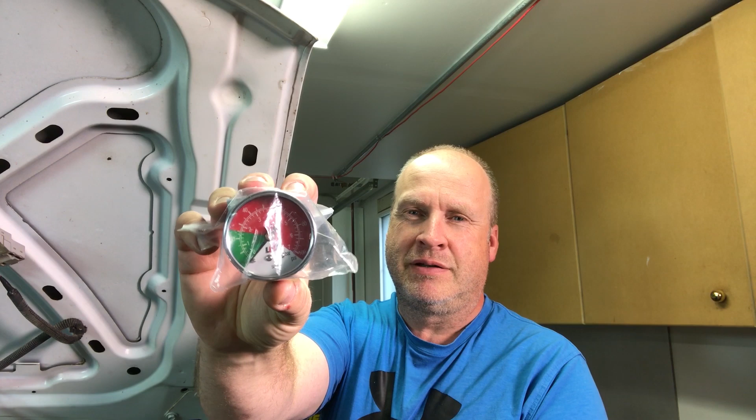So first thing we're going to do, the simple and easy way of checking your fuel pressure is we're going to put in a fuel pressure gauge, and that'll be good for just a quick visual indication of our fuel pressure. But I really want something that I can log in HP Tuners, so we're going to figure out how to wire in this. It's basically a pressure sensor that I got off Amazon. I think I got it a year or so ago when I first started the channel, and I was messing around with an Arduino boost controller, and I was using this as a boost pressure sensor, but I think we can make it work as a fuel pressure sensor input to the ECM as well.

But because I've already used my EGR wire to wire in the 0 to 5 volt from my wideband, and this sends out a 0 to 5 volt signal as well, we're going to have to find a different spot to wire that into. So I'm thinking it'll either be the fuel pressure sensor, or I've heard of guys using the AC pressure sensor, but I don't think my truck actually has that. So we're going to figure that out as we go, and hopefully we can make it work and be able to log our fuel pressure in HP Tuners the way the Gen 4 and Gen 5 guys do. So we will flip the camera around and get started here.

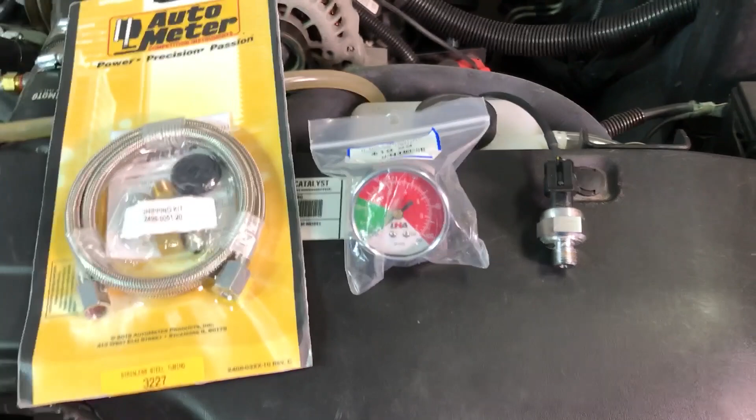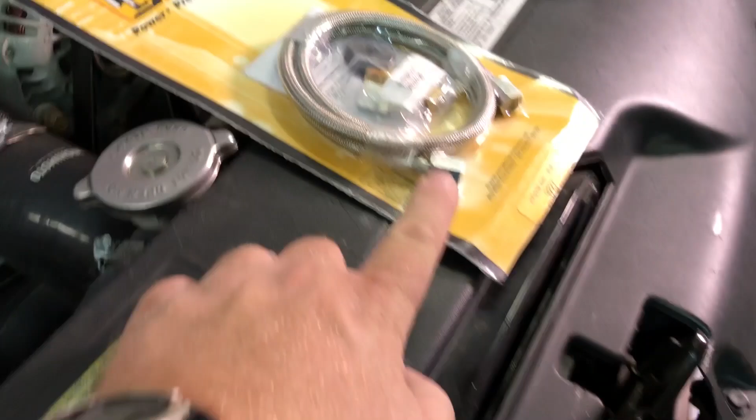Okay, so to plumb this, first we'll hook up the gauge, and I'm not sure if we'll have both the gauge and the sensor hooked up at the same time. I guess it'd be nice to do it that way so I can verify that my sensor reads the same as the gauge. But basically I got this Auto Meter braided hose, part number 3227, and there's a little Schrader valve inside this cap on the fuel rail here, so we'll thread that Schrader valve out of there and thread this hose onto there, and then there's some adapters and stuff here. And the gauge I just got at Princess Auto.

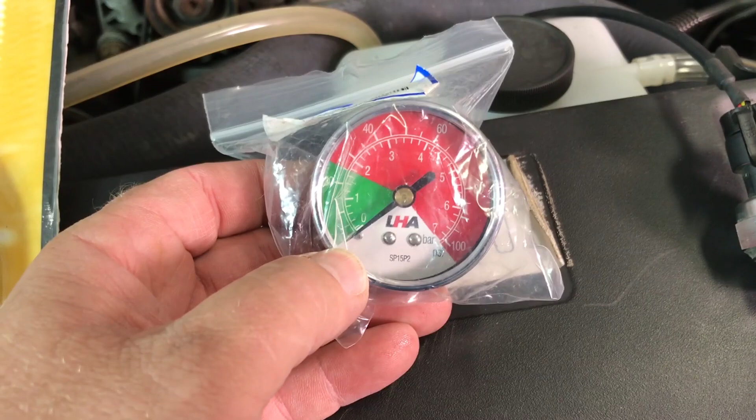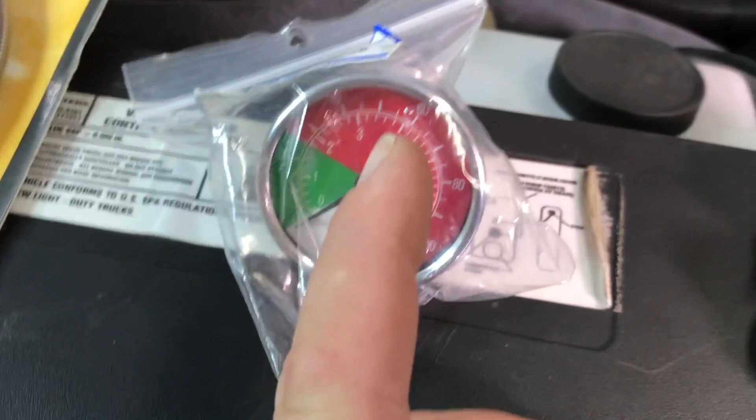I think it's actually meant for some kind of hydraulics, because it's got this red and green indication on here, but it's 0 to 100 psi anyways, which will be about the range we want, since it should operate at about 58 psi under normal conditions. And I think this is actually boost referenced. If you look at the fuel regulator, there's this hose that goes up to the intake manifold. So I think for every pound of boost pressure, I should have one more pound of fuel pressure. So we'll see if that's actually how that works.

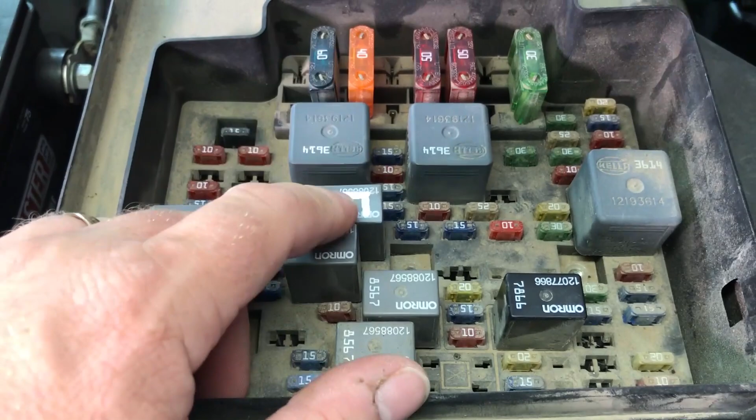But first, because there should be 58 pounds of pressure in that fuel rail, to relieve that pressure we'll open the fuse box under the hood here, and you can see, if I get the lighting right, I've marked one of these relays with an F, and that is the relay we've got to pull to disable the fuel pump. If you look at the chart here, it says that relay is F pump, but since I work on my fuel system quite a bit, I just put a big F on that relay there.

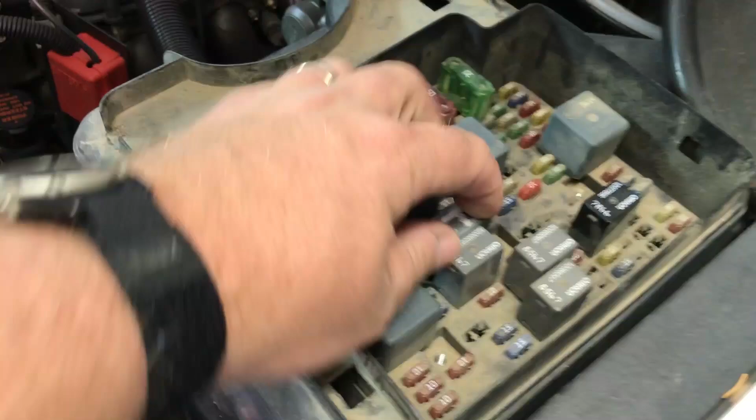So I will open up the garage door so we don't get gassed out here, and then we'll fire up the truck, and I'll pull that relay out. I'll just make sure it's kind of loose here, it sometimes takes a bit to get it out. I'll just put it in lightly there, and then we'll open the door, fire up the truck, and pull that relay, and that'll shut off the fuel pump, and it'll use up most of the pressure that's in the fuel rail system, and won't spray as much gas all over when we pull that little Schrader valve out. So we'll do that now. Okay, so I'm going to start up the truck like I said.

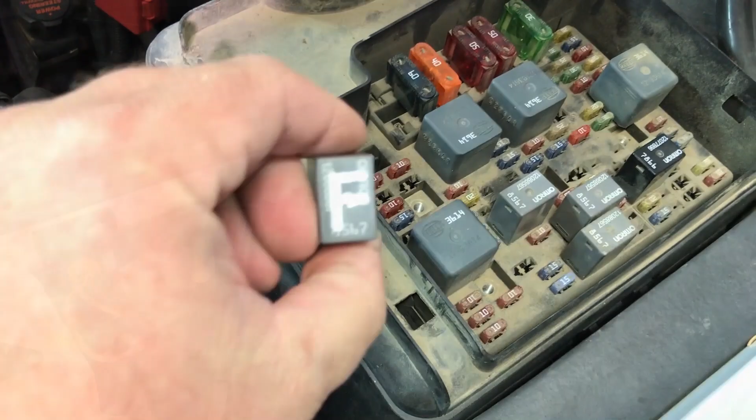And then we'll go pull the relay. Okay, so I got this Vortec cover loose here so we can access this port on the fuel rail. So I'm going to pull this little cap off, and then you should be able to see there's like a bicycle Schrader valve in there.

So I'm going to take a little screwdriver and just relieve any pressure that, oh yeah, there's still a bunch in there. I thought running that fuel pump would relieve a bunch of that, so I'll just give her a couple more shots here. Probably should have used some kind of bucket or container or something, but anyways, now I know that the fuel pressure is relieved and down to 0 there.

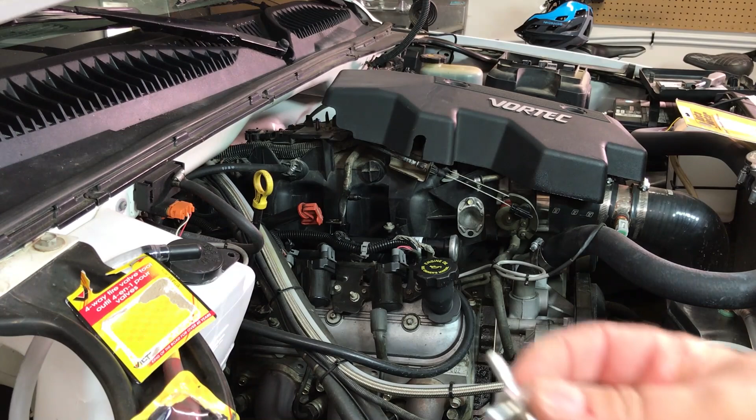I'm going to grab just a regular tire valve tool, and I think we should be able to thread that Schrader valve out of that port in the fuel rail there, so we'll do that. Okay, so I got just a regular tire Schrader valve tool. That's the package it came in, 4-way tire valve tool. So now I'm gonna reach in there, and now that we've relieved the pressure, we shouldn't get a big blast of fuel coming out, I don't think.

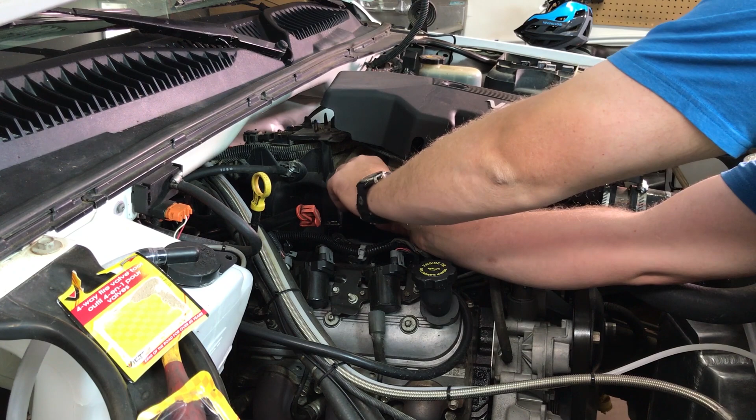There's a bit dripping down there, but oh, I guess it takes a bit more threading. Just thread it in there pretty good, so I'll put that tool back on. Thread her out a few more turns yet. And now I've got, I don't know if you can see that there, it's just like a regular tire valve like you'd use to put air in your tire. So now that we've got that off of there,

I'll open up this package here, and then I think this hose end here will thread directly onto that fitting on my fuel rail crossover pipe there. So okay, we got that hose out of the package, so we're just gonna thread it onto that fitting there, and it does thread on nicely, and it just takes a regular 9/16 wrench, and we'll tighten that up, but not go so tight that it strips. But seeing it is dealing with gasoline, and we're right above the hot exhaust manifold, and the turbo is right down here, we do want it good and tight.

And now we'll dig out that adapter kit that came with the set, and we'll basically adapt it to this gauge, and then we can actually take it for a drive and monitor our pressure just with the fuel gauge. Okay, to install this gauge, I've got this adapter that came with the kit. I think this is like an AN4 is what that hose is, and then it's just got a female 1/8 NPT, which is the same as what this gauge is. So I'll thread that onto there, and it just tightens up again with a regular 9/16 wrench.

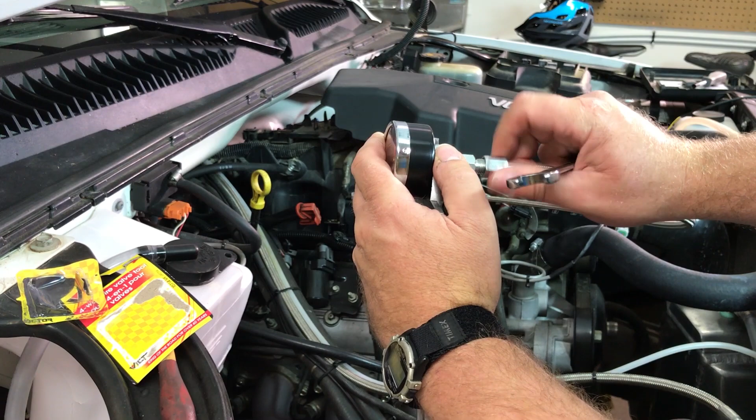And again, we don't want to strip the threads or anything, but we don't want it to be leaking gasoline anywhere. And then this other end of the hose will just thread on there like that, and we'll tighten that up. Now if we wanted to, because you're not supposed to mount a fuel gauge in the cab, we could mount a little bracket or something so you can see it through the windshield or whatever, eh? I've seen guys do that before, but

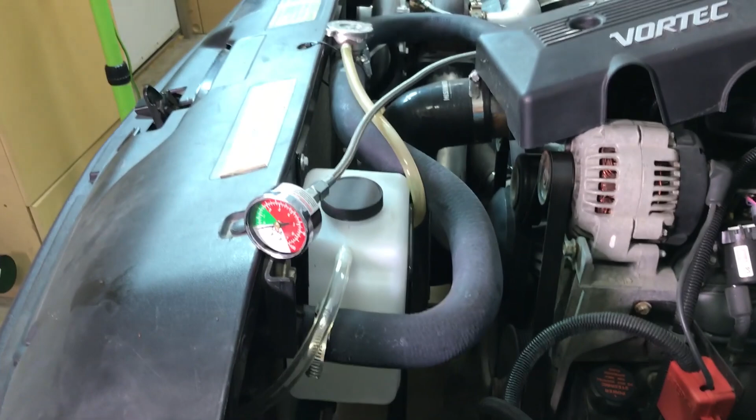I think for now I'll just set it up there somewhere where I can see it, and then we can take it for a drive and see what our fuel pressure is doing, and then we'll come back and work on getting this electronic sensor hooked up so we can log that in HP Tuners. Actually, I think rather than going for a drive, I'll just put this gauge where I can see it here, and if we plug our fuel relay back in, and if I go and turn the key on, we should see just under 60 pounds of pressure on that gauge, I think. So we'll turn the key on.

Sorry, camera cut out on me for a second there, but yeah, that's weird. I thought that with the truck not running I would still have my 58 pounds, but you can see I don't even have 10 pounds there. So maybe we'll try. I'll open up that garage door again and we'll actually fire up the truck and see what our fuel pressure does.

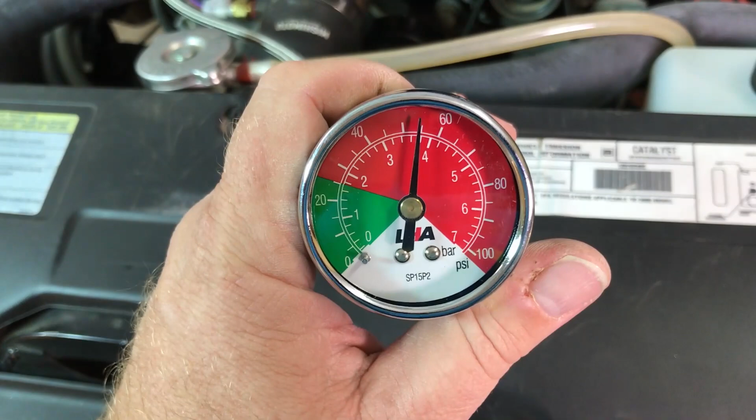And there you go. I figured out every time I start my truck, my phone connects to the Bluetooth in the stereo and stops the video that I'm recording. But you could see there when the truck was running that I had about, I think it was 55 pounds or so of fuel pressure. So the gauge is working. Now we'll look into getting that electronic pressure sensor working.

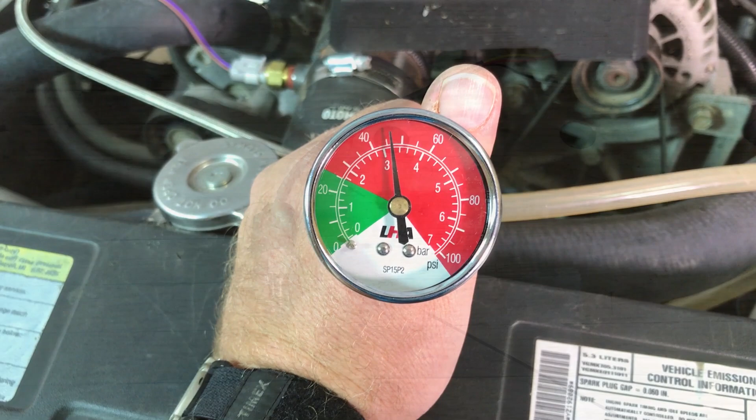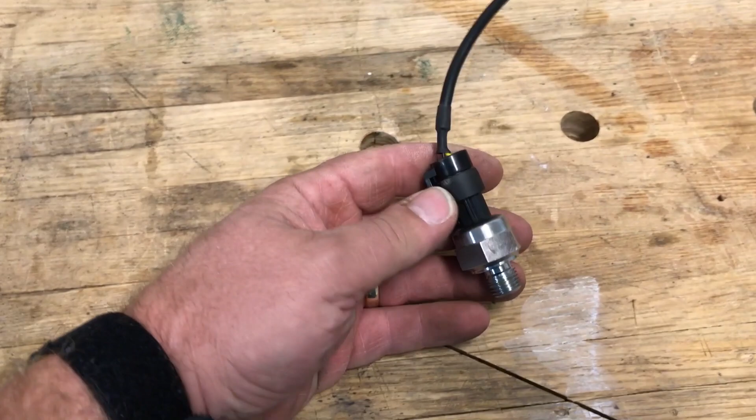Alright, so we got that pressure gauge working the way it should, and if we wanted just the pressure gauge we could mount that permanently. But like I said before, I kind of want something that I can log with HP Tuners, so we're going to try and figure out how we can get this pressure sensor wired into the truck and be able to log it in HP Tuners. The problem I've got is I bought this like a year ago for a different project, and I'm not sure what the range of it is.

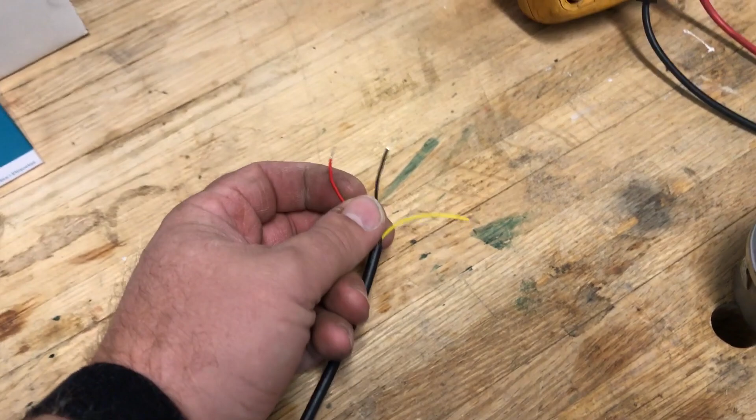I know it's 0 to 5 volts, so I'm going to do some testing on the bench. I've got a power supply here that I borrowed from the plant that I work at, and it is putting out 5.00 volts. So basically we've got to connect power to this red and black wire on this sensor. We'll put 5 volts to that, and then this yellow wire is the output of the sensor. The voltage coming out on this yellow wire will be proportional to the pressure that is on this.

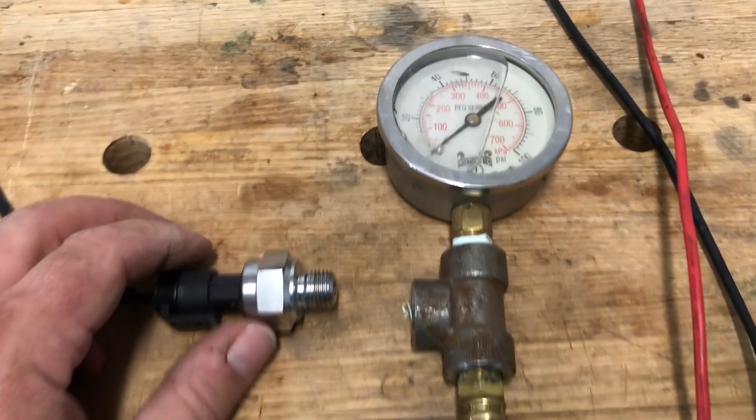To test this, I've got a little fitting rigged up tied into my air compressor down here. First of all, I'm going to hook it up with no pressure on it and see what we read for a voltage out on this yellow wire. And then, because we shouldn't have to go any higher than like 80 pounds, I'll put like 20 pounds on it and measure what we got for voltage, and then do 40 and 60 and 80, and make a chart of what my voltage is at each one of those pressures. Then we'll have to do a bit of math and figure out a formula to enter, a custom user defined math formula in HP Tuners.

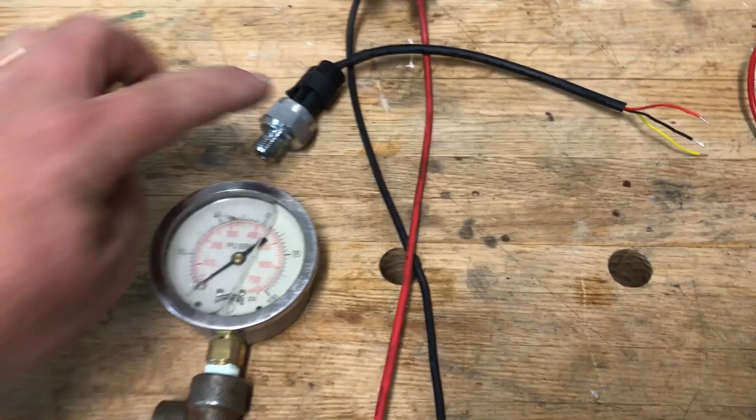But what we'll do right now is get this hooked up with the red and black to our 5 volt power and get rigged up to measure. Basically we'll be measuring the voltage between this yellow wire and the black wire and making a graph that will tell us the calibration, or the range of this pressure sensor. So we'll do that now.

Okay, so like I said, I've got 5 volts hooked up to the red wire, black wire is going to the negative on my power supply.

And then, oh, heater just kicked in. It's getting cold up here in Canada, and there's snow on the ground this morning.

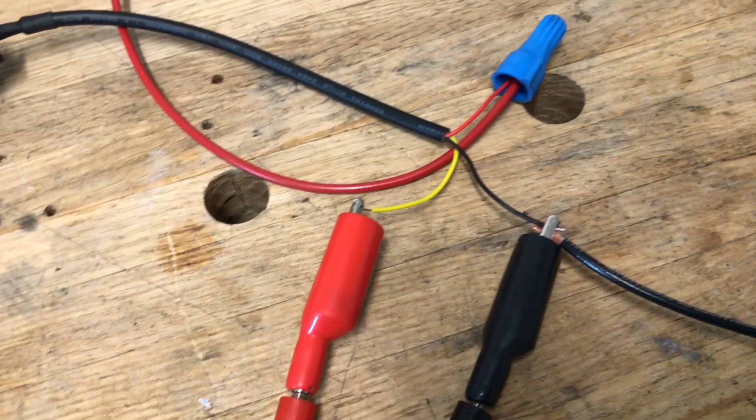But anyways, we're measuring the output of this pressure sensor on the yellow wire, with reference to ground on the black wire. So you can see with no pressure on it, just sitting on the bench, we've got 0.491 volts. So I'm just making a chart here. I wrote down at 0 psi, I've got

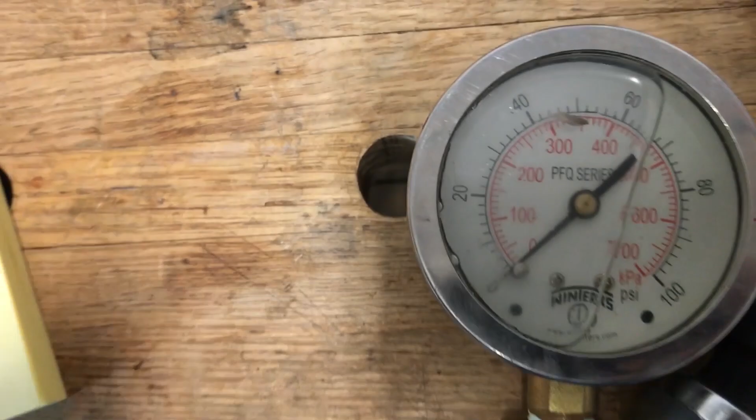0.491 volts on it. So now we'll thread this sensor into this T-fitting here and crank up the regulator on the compressor until we've got 20 pounds of pressure on it, and record our voltage. Then we'll do it at 40 and 60 and 80 pounds as well. We shouldn't need to go higher than that, but maybe we'll do it at 100 as well, just in case I'm running 40 pounds of boost at some point. So we'll do 0, 20, 40, 60, 80, and 100 psi.

Okay, you can see we're at 20 pounds on the gauge there, and we're at 0.944 volts at 20 pounds. So I'll write that down on my little sheet, and then we'll go up to 40 pounds. And now you can see we're at 40 pounds on the gauge, and we're at 1.412 volts on the voltmeter on the output on our yellow wire. So we'll record that and go up to 60 pounds.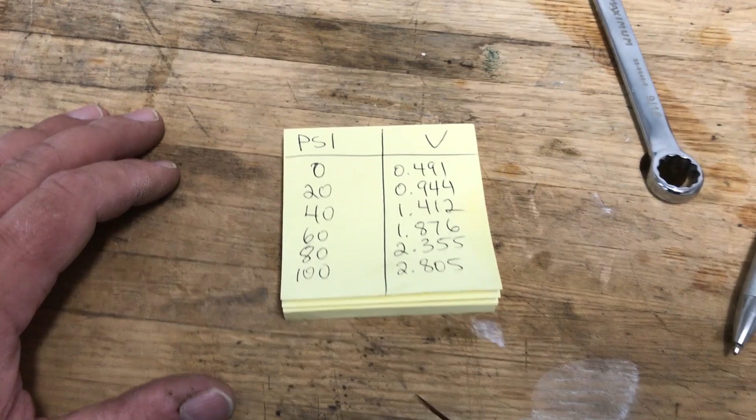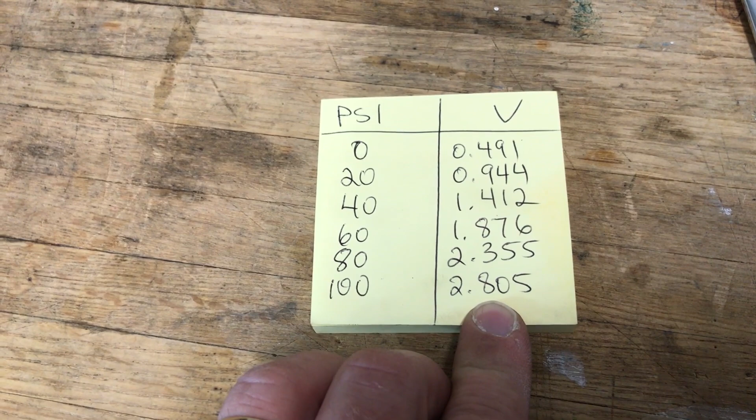Alright, so there's our, I don't know if you want to call it a calibration chart or range, but basically it's telling us what the voltage is for each pressure in 20 pound increments from 0 to 100. So now we've got to figure out a formula, and I shouldn't have dropped out of high school because I remember something like y equals mx plus b or some deal. But basically we got to figure out a formula to multiply this number by some constant, and add some number to it to get this number, and see if we can figure out one formula that will work for all of these numbers.

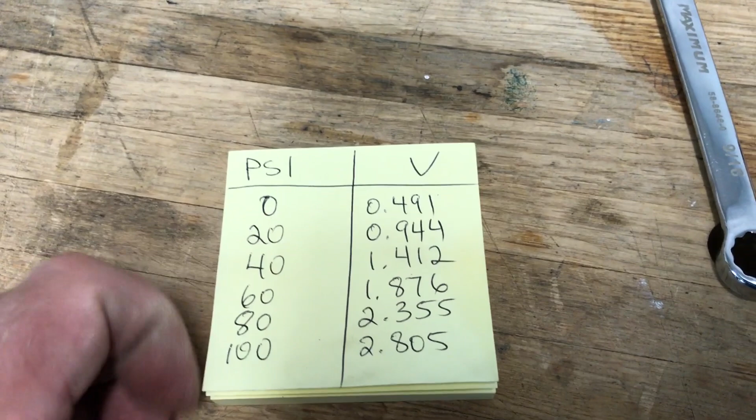So I'm going to shut off the camera for a minute and think about this, but I'm thinking the number we're going to have to add in the equation will be this 0.491, because, or subtract, I don't know. Let me get my head wrapped around this, and once I've got it sorted out, I'll turn the camera back on. Alright, I think I got this figured out here.

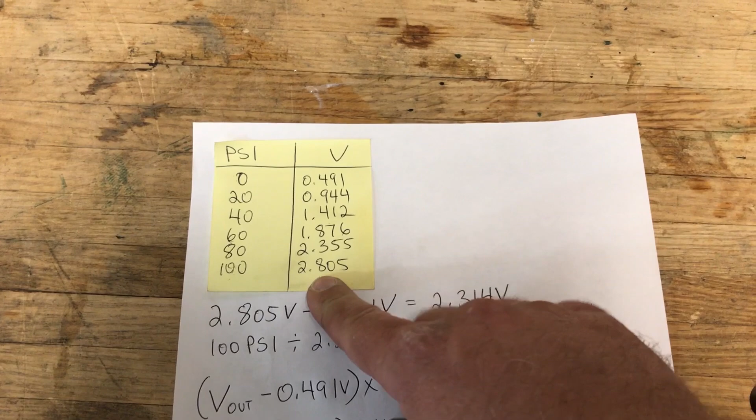So I took this chart from the test we just did here, and we know the change in PSI is 100, so I had to figure out the change in voltage for that 100 PSI. So I took this voltage at 100 PSI, the 2.805, and I subtracted our voltage at 0 from it. So I got 2.805 minus 0.491, and that gives me a change in voltage. So the voltage changed 2.314 volts when the pressure changed 100 psi. So that helped me come up with this number.

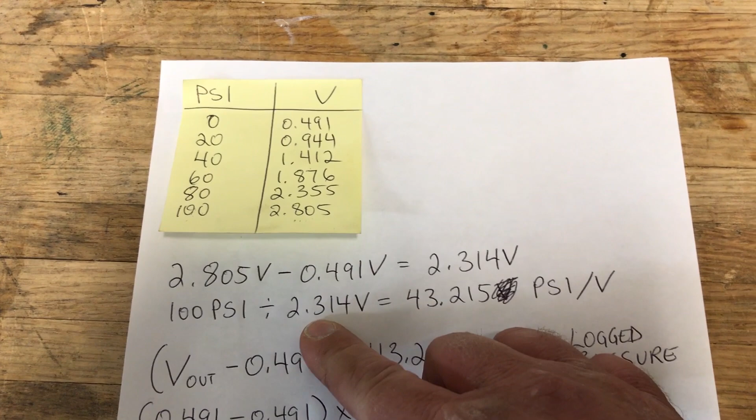So I took the change in pressure, which is 100 psi, divided by the change in voltage, 2.314 volts, and I came up with this factor of 43.215 psi per volt. So anytime the pressure changes 43 pounds, the voltage will change a volt.

So I use that constant to come up with this formula here, which is what we'll end up entering into HP Tuners. So basically you take the voltage that this sensor is putting out on the yellow wire, subtract 0.491 from it, and multiply it by this 43.215, and that will give you the pressure being logged by HP Tuners. So I just went through and tested all of the voltages on this chart. So at 0 psi, obviously 0.491 minus 0.491 is 0, times 43 comes up with 0.

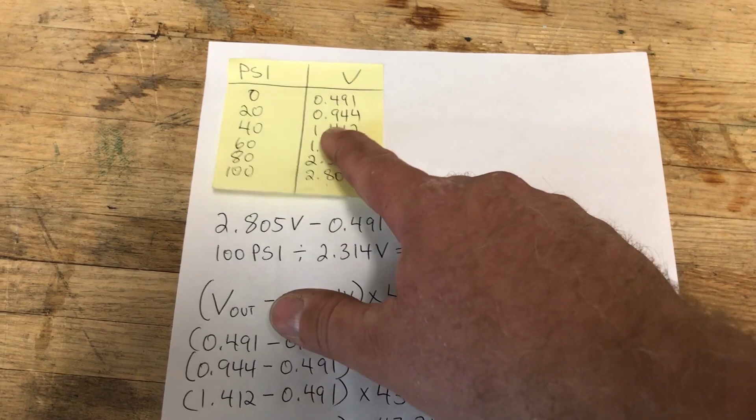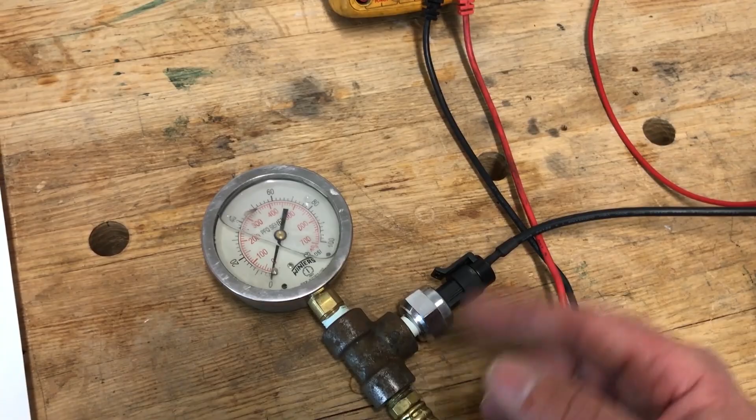This 0.944, subtract our 0.491, multiply by our 43.215, and we come up with 19.57. So the reason it's a little bit out is because this sensor isn't linear, it's not going to be dead on. But the main thing is, I checked it at 40, we'll be logging 39.8, but the pressure we're actually running at, which will be 58, we're only 0.15 of a psi out at 60. So it's pretty well bang on.

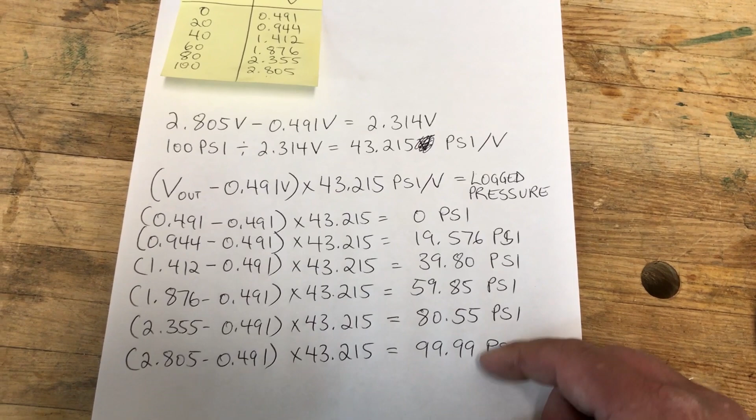It's 0.2 psi out at 40, 0.15 psi out at 60. At 80 it's a little high, and at 100 it's bang on. But at the pressures we'll be operating at, it'll be pretty darn close. So that's the formula we're gonna end up entering into HP Tuners.

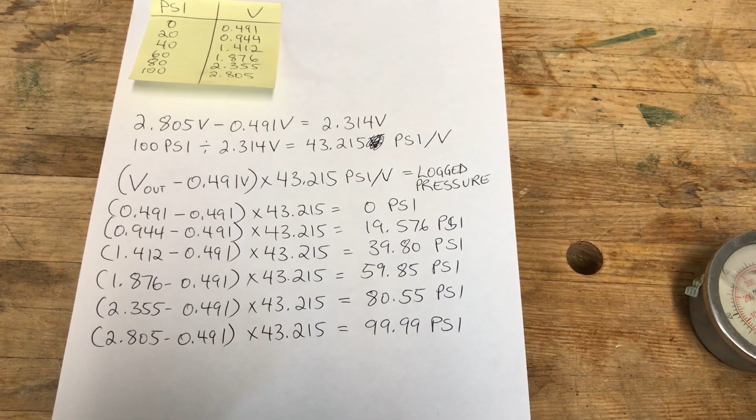But first, I got to figure out how we're going to get this sensor wired into the truck. So I did a little bit of research, and I found out that these trucks, like I mentioned before, don't have that AC pressure sensor. So I think I'm going to have to go with the fuel tank pressure sensor. So I think we're going to put the truck up on jack stands here and see if we can find that wiring for our fuel tank pressure sensor.

Okay guys, so I got the truck up on jack stands here, and I actually hooked up my laptop and started up the scanner here, and I added a channel. I'll show you guys how to do that in a little bit here, but added a channel for fuel tank pressure, and right now it's reading 1.56 volts.

So I'm going to crawl under the truck and disconnect the connector on top of the tank and make sure that drops to 0, and that will tell me that I'm dealing with the right wires that I want to wire up my Amazon sensor to there. So we'll crawl under the truck now and disconnect that sensor and make sure we got the right wires that we're working with there.

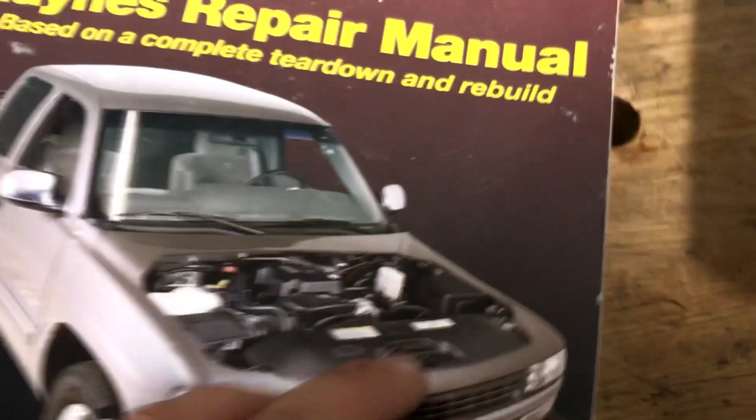And just before we go under the truck, I'm going to look at the wiring diagram here, and this is in a standard Haynes repair manual for this truck. And so it shows fuel tank pressure sensor. The colors we're looking for are black, dark green, and gray.

And from what I've seen, like from wiring in the EGR sensor and stuff, the black and the gray are pretty standard colors. Like if you follow the gray, it goes over here and over here. And so the gray is your 5 volt power to the sensor, just like over here on the bench. We've got our 5 volts power. That's always on that red wire. So that's the wire we're going to connect the red wire of the sensor. We're going to connect to the gray wire in the wiring harness.

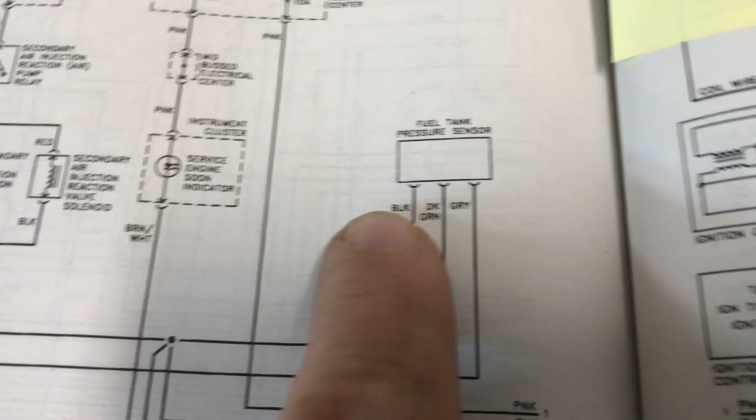And then the black is your negative, so that's going to be the same as the black of the negative on that sensor. And then the dark green is going to be our signal wire, which is going to connect to the yellow wire on the sensor. So we'll crawl under the truck now and try and find the connector for that sensor, and I'll unplug it, and then we'll verify on the scanner that our voltage has dropped to 0. So we'll see you underneath the truck.

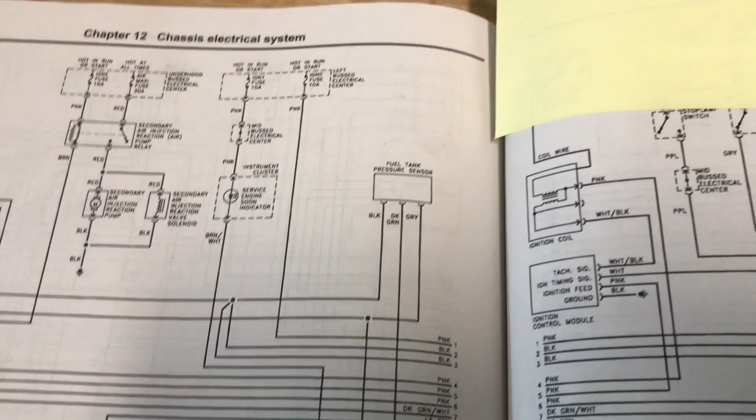Okay, I'm underneath the truck. I'm looking at, this is the top of the fuel tank, that little hanger where your fuel pump and stuff connects to. So you can see the two wire bundles there. The one on the right, I believe, is the fuel pump, and the one on the left, that one right there, I believe, is the connector for that fuel pressure sensor.

So I'm gonna have to turn the camera off here and reach up in there and unplug that connector, and then we'll get those wires out of there, and I'll verify that our voltage has dropped to 0 on the scanner. So alright, you can see that's the top of the gas tank there. I got this connector disconnected, and those are the wires that correspond with the colors in that wiring diagram I just showed you guys. We got a gray, a black, and a dark green.

So those are the wires we need to connect our sensor to, but the problem is we got to get them up to the front of the truck, to the engine compartment. You can see I've got them pulled out of the harness a little bit there. I'll try and pull them out a bit more, but I think we're gonna have to run some other wires to extend them back up to the front of the truck.

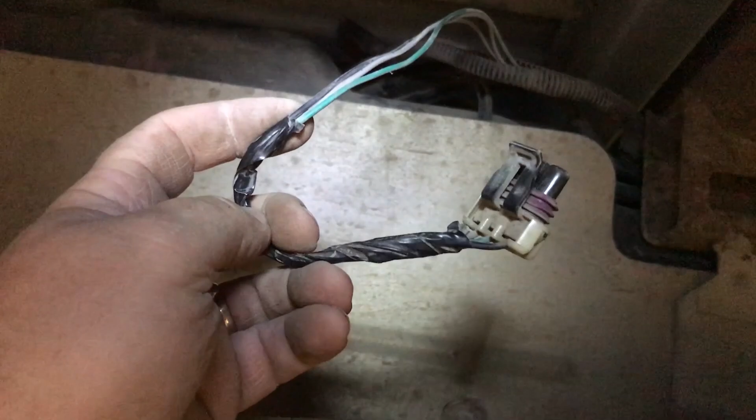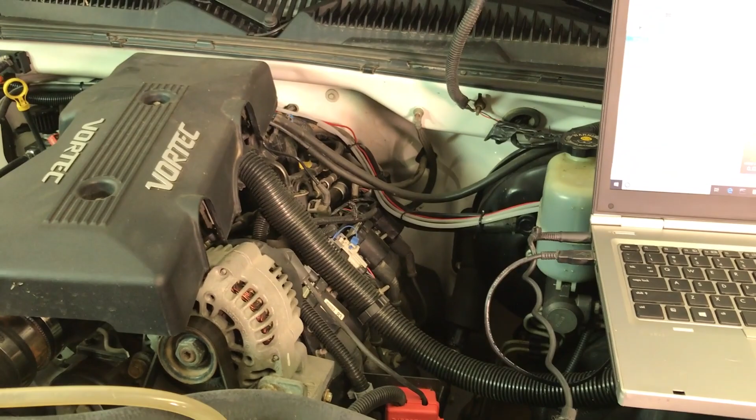Okay, and now that I've unplugged that connector, you can see our fuel tank pressure sensor voltage has dropped to 0.02. So that tells us we're dealing with the right wires. So now I got to figure out how to route them wires from back by the fuel tank to up here somewhere where I can connect to my fuel pressure sensor. So we'll figure that out now.

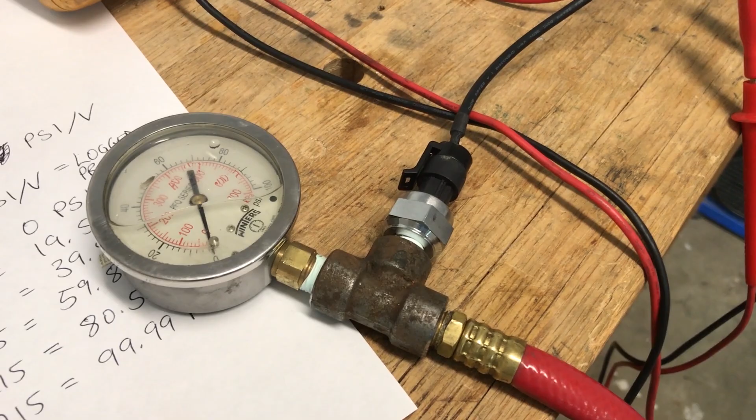Okay, so that wiring harness for that fuel pressure sensor is too intertwined with the main harness. I can't get the wires up to the engine compartment there, so I'm just going to extend them. This is basically trailer wiring. It's four 14 gauge wires all bundled together, so I'm going to use that to extend that wiring up to the engine bay so I can connect this little fuel pressure sensor here. So we'll do that now. I'll get this wire ran from the fuel tank area up to, and I'll show you guys here.

So I got that braided hose connected to the fuel rail right there, and I just kind of ran it down underneath the throttle body, and it's coming up, and I'll mount that fuel pressure sender probably to the firewall right around there, I think. So that's the area I want them wires to come up, so we'll do that now.

And that's what that bundle of four 14 gauge wires looks like when it's off the roll. I just cut a chunk long enough to go from the fuel tank to the engine compartment, and then because I only need 3 wires, I think I'm going to peel that green wire off of there and just use the white, brown, and the yellow. So we'll get that wire ran now.

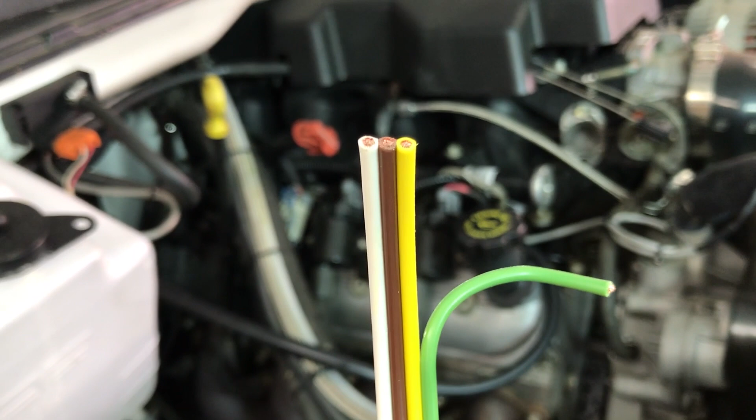Okay, I just wanted to show you guys how I routed this wire here. So I'm going to splice that bundle of 3 wires onto the 3 wires that I disconnected from the top of the fuel tank there, from the pressure sensor. And then I just ran them. Let me grab my light here. So there's some kind of fuel hose there that I zip tied it to, to keep it away from the drive shaft.

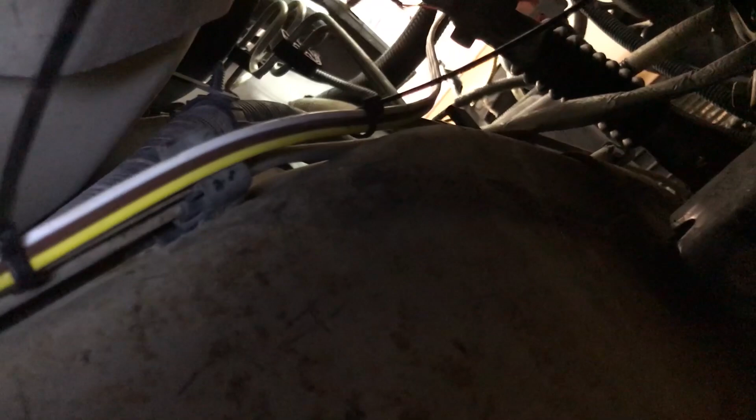And then I zip tied it to some, hard to see, but zip tied it to some brake lines, went around this ABS module or whatever, and then zip tied it to some more brake lines, and now we're up by the front of the truck. Zip tied it to more brake lines. I forgot to cut the tags off my zip ties there, and then it goes up into the engine compartment there. You can see the steering column and all that. So that's how I got it from the fuel tank up to the engine area. So we'll go back to the fuel tank there and splice up those wires now.

Okay, just wanted to show you guys how I splice these wires together down at the fuel tank. So these are those 3 wires in the wiring harness that used to connect to that fuel pressure sensor, and I just connected the gray to the white, the brown to the black, and the green to the yellow. So again, the gray will be our +5 volt supply. The black will be our ground or our common or reference, and the green is going to be our signal.

So on the other end, when we connect to the sensor, white will go to the red, brown will go to the black, and yellow will go to the yellow. So now I'm just gonna zip tie this up out of the way so it stays away from the drive shaft here, and then we'll go up under the hood there and get that sensor wired up.

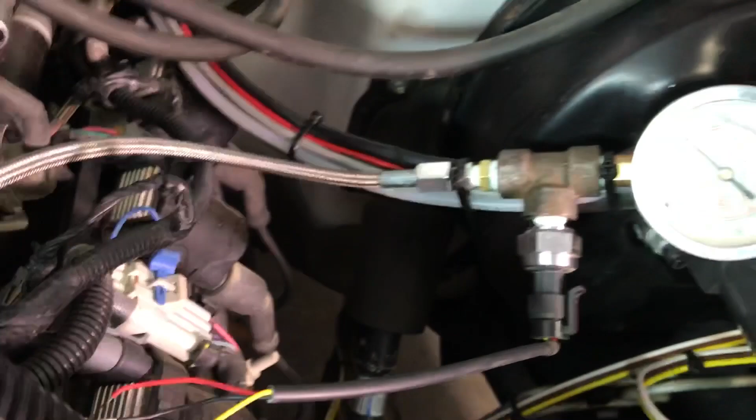Okay, I'll show you guys the engine bay side of it now. So now I'm looking down from the top, and you can see where I've got that wiring harness zip tied to those brake lines, and then it comes up, and then I just left an extra loop of a couple extra feet of wire, because in the future I'll probably mount that sensor to the firewall, but for now I've just got it zip tied to this bundle of wire, and I've got a gauge in there too, so I can compare what my sensor is reading in HP Tuners with what the gauge is saying.

And like I said, I've just got that braided fuel line ran underneath the throttle body and connecting to that fitting on the fuel rail like I showed you earlier in the video. So it just goes down underneath there and over to that T fitting where I've got the sensor and the gauge. So now I'm gonna cut these wires right about here and connect them to these wires going to the sensor.

And then like I said, if you wanted to, you could put another hose off of there and run a fuel pressure gauge to somewhere where you could see it from the cab, but if my sensor's reading 0, like the gauge is reading 0 right now, and when I pressurize the fuel system and start the truck, if it's reading 55 or the same as the gauge, we'll call it good, and I'll trust that sensor. So I'm not even going to install that gauge where I can see it.

And like I said, in the future I'll probably get rid of that T fitting and just mount the pressure sensor to the firewall right in there somewhere. But this will just be kind of a temporary setup to see if it works.

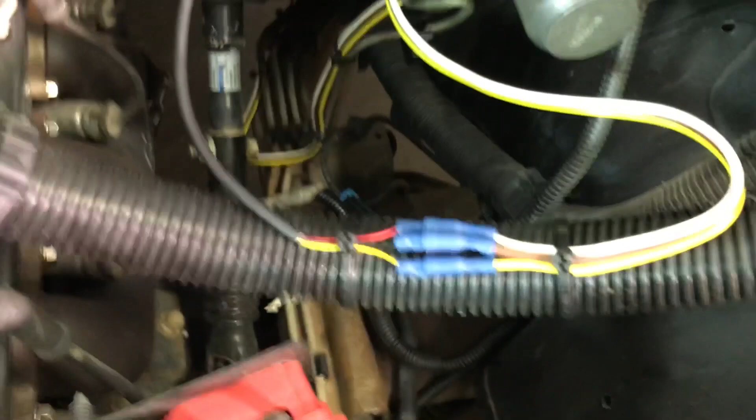All right, and there you can see I've got the wires connected there, and like I said before, yellow is going to yellow, brown is going to black, and white is going to red. So now I'll hook the laptop up again and turn on the key. When I had that sensor on the bench with no pressure on it, I think it was reading 0.491 volts.

I'll hook up the laptop and we should be reading that same amount because we've got 0 fuel pressure on the gauge. Actually, before I check that, I'm going to pull that fuel pump relay out again. Otherwise, as soon as I turn on the key, that's going to start pressurizing that system. So we'll do that test with this fuel pump relay out.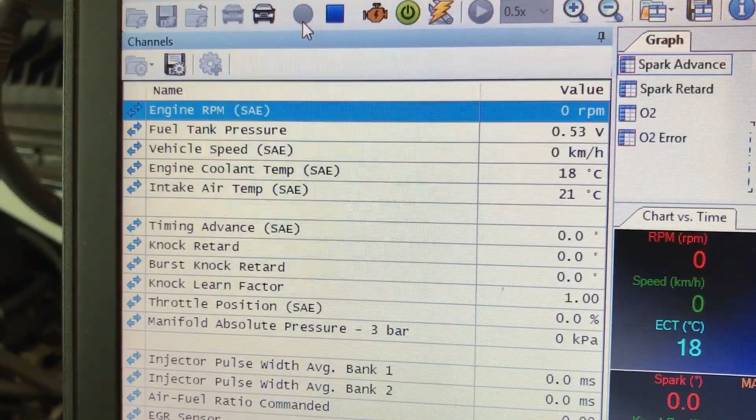Alright, so I got the laptop fired up and logging with 0 pressure on the gauge, and I'm seeing it's bouncing between 0.51 and 0.53 volts. That's pretty close to what I had with my other power supply on the bench, about 0.49 of a volt, so it's 2 or 3 hundredths of a volt different. So that's actually the value I'm going to be using in the formula. Instead of subtracting 0.491, I'll subtract 0.51.

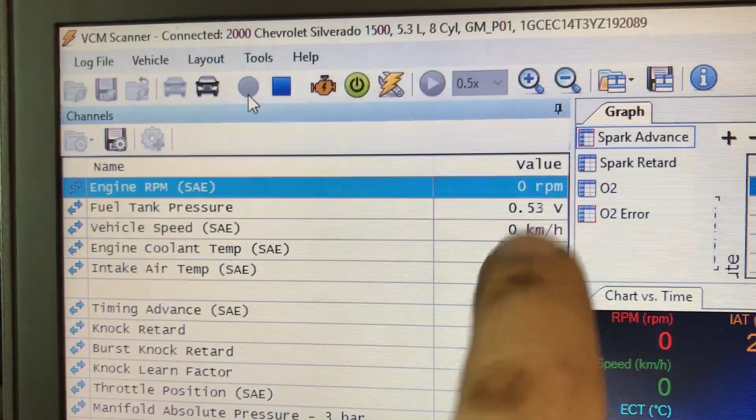So switch to the laptop's view now, and we'll figure out how to enter that user math and get it set up so that we can log our fuel pressure in our VCM Scanner. Okay guys, so got the laptop view fired up here. First I'll show you how to add that channel. I had it added before, but I deleted it again so I can show you guys how to do this.

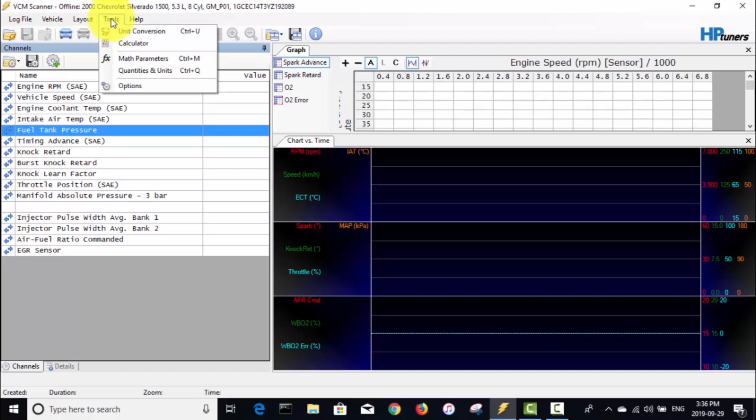So you click on that gear with the plus sign to add a channel, go into fuel system, tank, and fuel tank pressure right there. You can double click on that and you can see it added it in right there. So now we've got to add a user math formula for converting that voltage to a PSI that makes sense to us. So you click on this tools tab up here, go into math parameters.

It's under this user maths tab here, and I've already got 4 custom user math things plugged in. So I'm gonna pick my first available one, which is user math number 5. Click on that, and we're gonna call this fuel pressure. We're gonna add a new variable. Click on this link here. We're gonna add that same fuel tank pressure voltage. Double click on that, and it's in volts. We don't need any special functions, so we'll just click OK.

So there is the parameter for fuel pressure. I'm gonna go add in another bracket here. Whoops, not that kind of bracket, that kind of bracket. So we're going to take that and then subtract that 0.51 volts that we were seeing in the scanner here when we had 0 pressure on there.

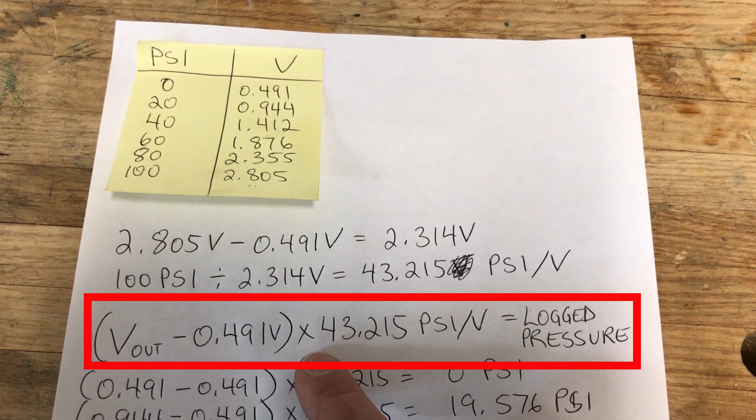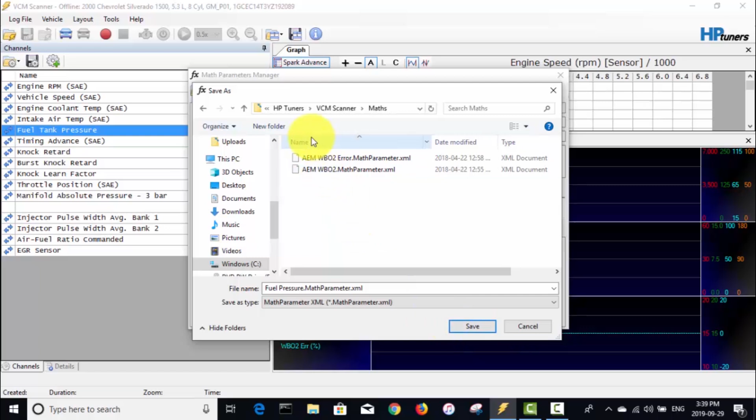So now that we've got that user math parameter in there, not sure if we need to save it. Let me just have a look here. Maths. Yeah, so I've got my wideband O2 math parameter saved in there. So I'm going to save this fuel pressure math parameter in the same folder under HP Tuners, VCM Scanner, Maths. So that is saved.

So now we should be able to close that out and add it to one of our graphs here. I'll right click on this area here, go to charts layout, and these other groups already have 4 parameters in, so I'm going to add it to this group 3. So we go add series, and we'll call it fuel pressure.

Oh, I guess you can't have that many letters. We'll abbreviate it, and then click on this link, and we'll have to scroll down to our user defined maths, and click on our formula that we just added in. Our units will be PSI. Doesn't let me select those here for some reason.

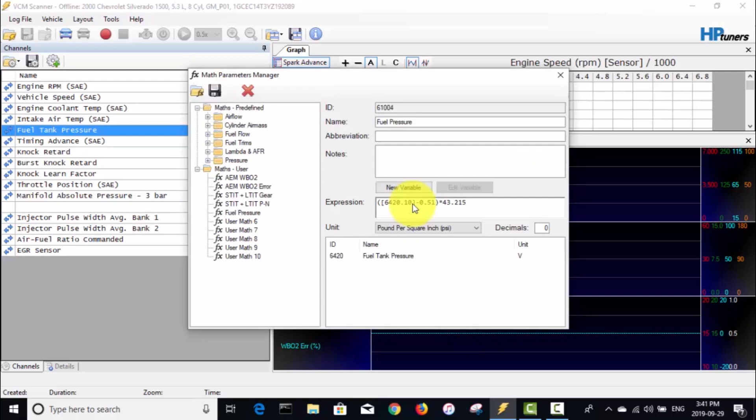Let me go back. Just going to close out of this for a second, go back to that math parameter and see if there's a place I can set the units. Yep, right there. PSI. So now I'll save that again. Yes, I want to replace it. Should be able to close out of this now and go back to our charts layout, fuel pressure, and let me delete this and start over.

So I'm going to add a series, fuel pressure, abbreviated, add our user defined math parameter, and there it lets me pick pounds per square inch right there. Decimal points, let's go to 2 decimals. I'm not planning on running much more than 15 pounds of boost, so 15 pounds over 58 or 60 would be 75, so if we go to 80, that should be fine.

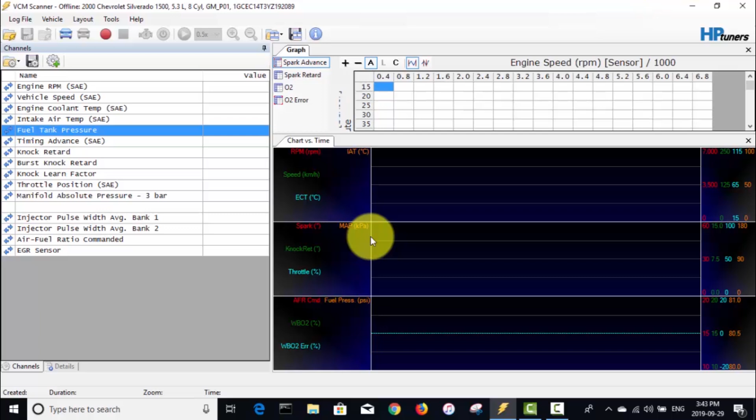Color, whoops, reference line, we don't need color, pick one. And now I'll save this, we'll save all groups, and I'm calling this my VE tuning chart, so we'll save that. Yes, I want to replace it. Okay, now I will pause this for a second because I'm sitting over on the workbench, not connected to the truck. We'll take the laptop over to the truck and see if we can log our fuel pressure here.

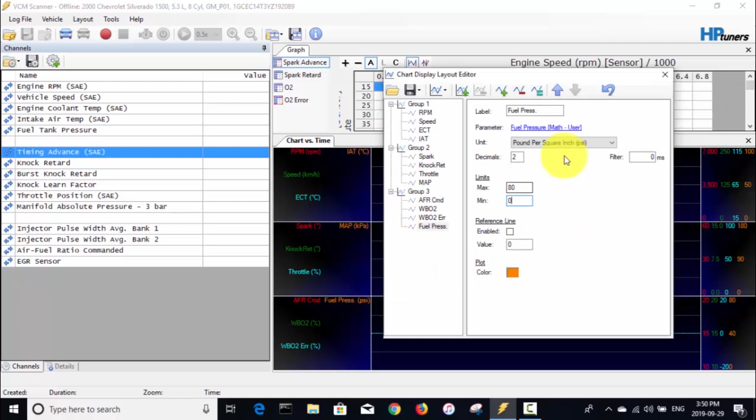Okay, I just noticed a mistake that I made in the last part of the video. I entered that 80 in the wrong spot, so minimum should be 0, maximum should be 80. I had 80 in the minimum spot here, so we'll save that again. All groups, Randy VE charts, and yeah, now it's looking right. So now we'll go over to the truck and try some logging.

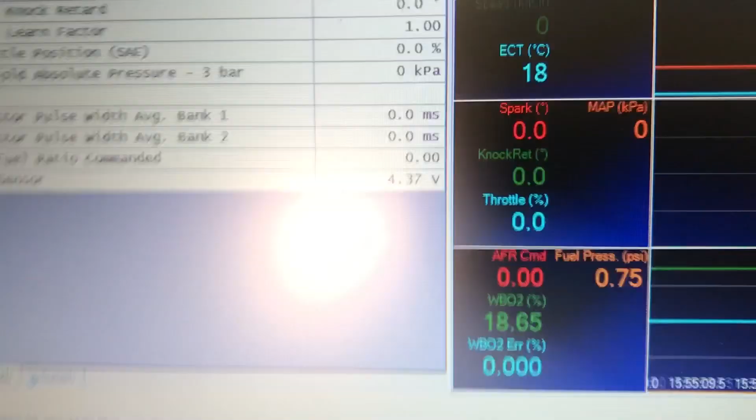Alright, so I'm hooked up and you can see we've got 0.53 volts from our fuel tank pressure sensor, which is corresponding to 0.75 psi, which agrees with the gauge. So now I'm going to plug in this fuel pump relay and we'll see if that pressure starts to come up. So plug that in, and let me go turn the key off and on here.

And there you go, you can see our fuel pressure came up to 6 pounds there. We're logging 6.66 psi, and that basically agrees with what the gauge is saying. So I'm going to try fire the truck up and we'll see what happens to our fuel pressure there.

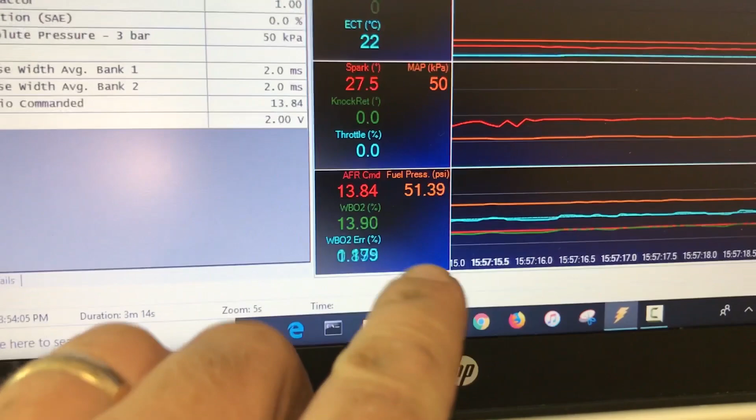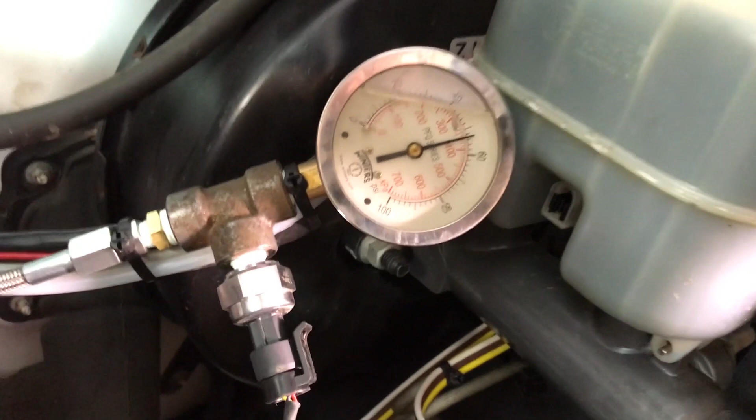And there you can see we're running at 51, 52 psi. Let's see what the gauge is saying. And that's pretty well, gauge is saying less than 55 anyways, so we'll call that pretty good.

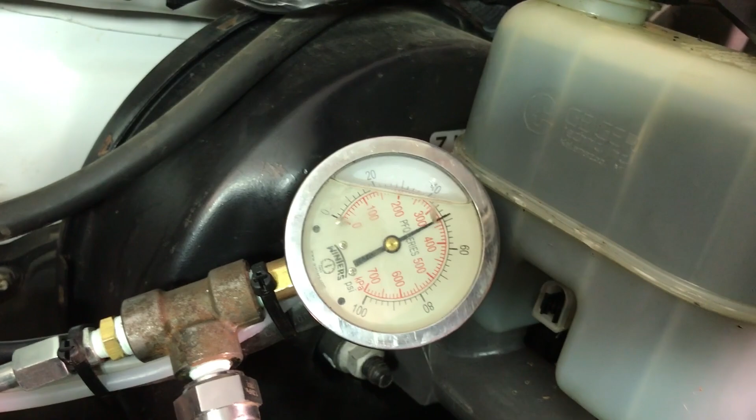And I just shut the truck off. You can see that it's dropping slowly. It was at 48.02, now it's at 47. There it's showing about 48, so I think we'll call that a win. We're logging fuel pressure from that new sensor I installed.

Okay guys, I think we're going to wrap this one up. We've got that fuel pressure sensor working and logging in HP Tuners. So next video we're going to take the truck out and test this sensor out on the road. Like I've said in previous videos, I suspect that my stock fuel pump isn't keeping up, but now that we can log our fuel pressure with HP Tuners, I'm going to go out and try and confirm that. And even if that isn't the case, we're going to put in that new 525 Walbro Hellcat pump. So stay tuned, that'll be coming up in a future video.